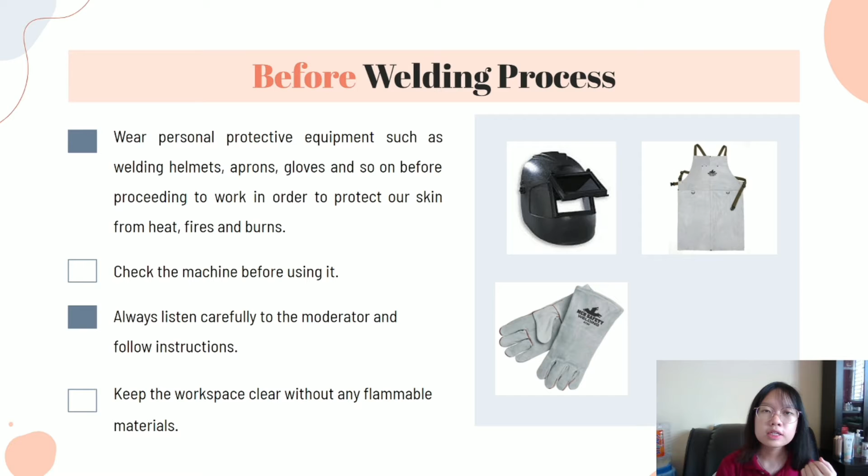During welding process, yang pertama, do not touch the metal parts of the electrode holder with skin or wet clothing. Yang kedua, notify the workshop supervisor immediately if the equipment encounter a problem.

Yang ketiga, keep your head out of the fumes and do not breathe the fumes. Sebab fumes tu akan mempengaruhi kesihatan kita seperti dia akan menyebabkan serious lung disease dan masalah pernafasan.

Yang keempat, do not leave the welding machine unattended when it is still running. Yang kelima, turn off all equipment when it is not in use.

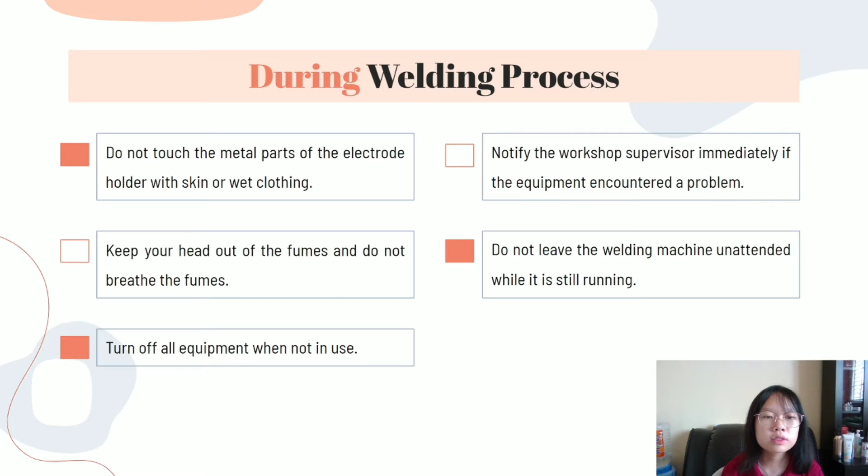Sekarang saya akan menerangkan prosedur bagi welding process. Step pertama, wear the personal protective equipment seperti welding helmet, gloves dengan apron. Step kedua, read the instruction at the welding machine.

Step ketiga, prepare 2 metal pieces and clean both of them. Step keempat, hold the workpiece firmly in a suitable fixtures.

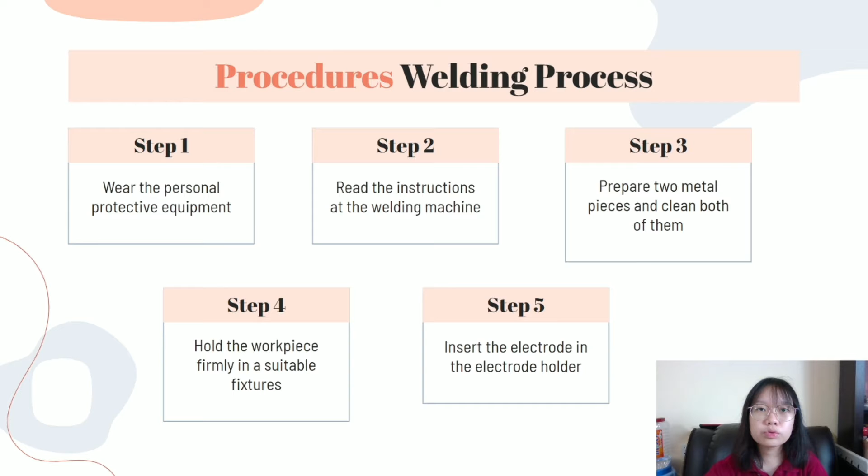Step kelima, insert the electrode into the electrode holder. Step keenam, switch on the welding power supply and set the current between 60 to 100 amperes depends on our types of electrode.

Step ketujuh, for the bead on plate welding, hold the electrode at the angle of 60 degree with 2 to 3 millimeters of clearance above the workpiece.

Step 8, hold the electrode over a spot at the left edge of the workpiece until a molten pool is formed. Step ke-9, move the electrode slightly from the left to the right and hold about 1 to 2 seconds before finishing the operation.

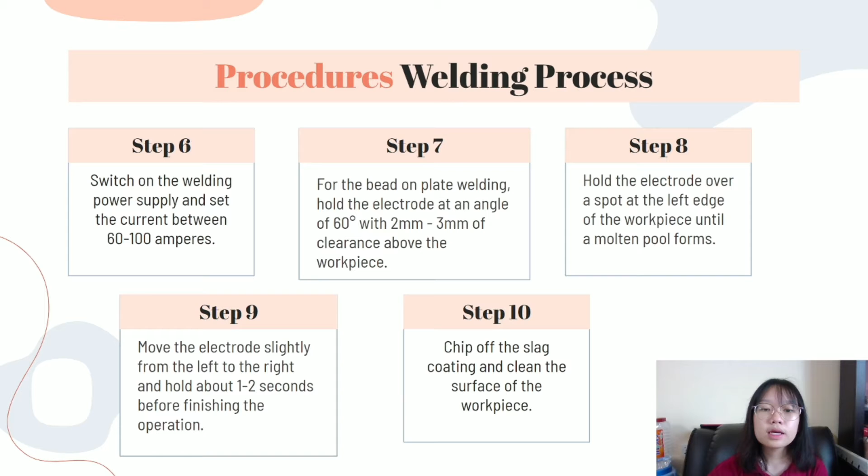Step ke-10, chip off the slag coating by using the chipping hammer and clean the surface of the workpiece by using wire brush.

Step ke-11, repeat all the steps for the other metal pieces. Step ke-12, for the butt weld square joint, place the 2 workpiece on the table and form a square butt joint macam gambar sebelah.

Lepas tu kita pun repeat the step dalam bead on plate welding. Step yang terakhir dalam welding process adalah clean the slag and dust around the area and keep the tools to its original places.

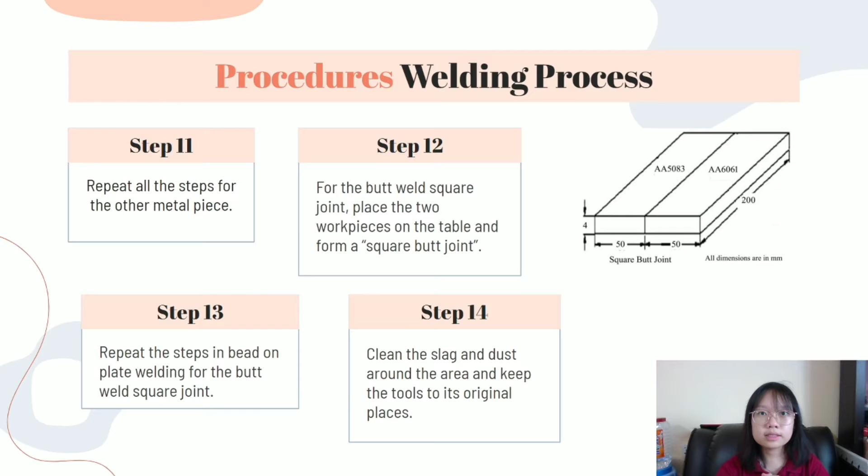Sekarang saya akan membincangkan electrode polarity. Dia ada 3 jenis. Yang pertama, straight polarity iaitu direct current electrode negative dan tujuan dia adalah untuk membuat shallow weld penetration.

Yang kedua adalah reverse polarity iaitu direct current electrode positive dan tujuan dia adalah untuk membuat deeper weld penetration.

Yang ketiga adalah alternating current dan tujuan dia adalah untuk membuat thick sections welding dan give pulsing arc.

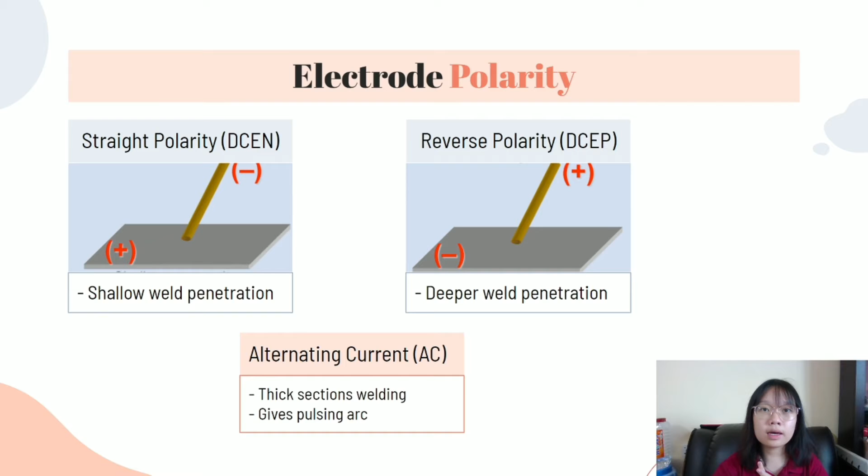Sekarang saya akan menerangkan electrode design di mana huruf E itu indicates electrode. Lepas tu, the first 2 digit indicates the tensile strength.

The third digit indicates the position, where the number of 1 is for all position, termasuk horizontal, flat, vertical dengan overhead.

And the number 2 is for flat and horizontal only. The last digit indicates the types of current and coating.

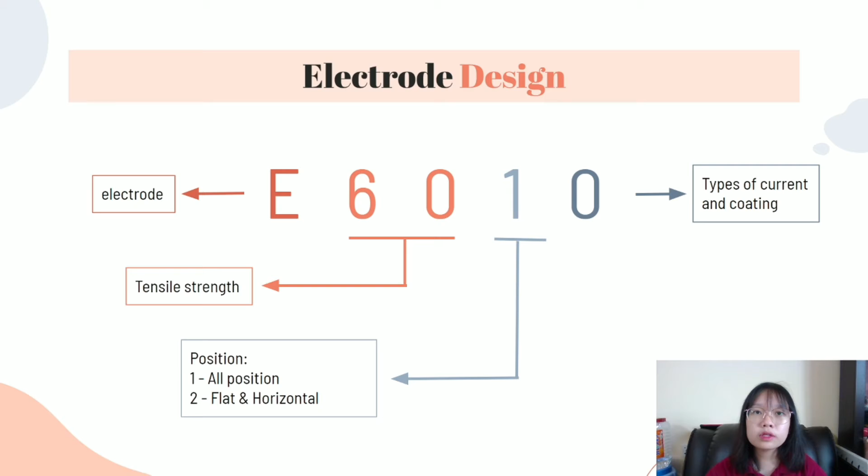Sekarang saya akan menerangkan types of electrode dan dalam ini saya akan memberikan 4 example sahaja.

Yang pertama adalah 6010. Dia dapat digunakan dalam DC electropositif sahaja dan dia punya arc length adalah 3.2 mm dan current dia adalah 85 amperes.

Properties dia adalah good in all position dan slag does not peel. Yang kedua adalah 6011. Dia dapat digunakan dalam DC electropositif dan AC.

Arc length bagi kedua-dua ni adalah sama sebanyak 2.4 mm dan bagi DC electropositif dia punya current adalah 70 amperes dan bagi AC dia punya current adalah 80 amperes.

Properties bagi 6011 ni adalah good in all positions dan slag does not peel. Yang ketiga adalah 6013. Dia boleh digunakan dalam DC electropositif, DC electronegatif dan alternating current.

So arc length mereka adalah sama sebanyak 3.2 mm dan bagi DC electropositif dan DC electronegatif dia punya current adalah 100 ampere dan bagi AC dia punya current adalah sebanyak 115 amperes. Properties bagi 6013 ni adalah good in all position dan peeling slag.

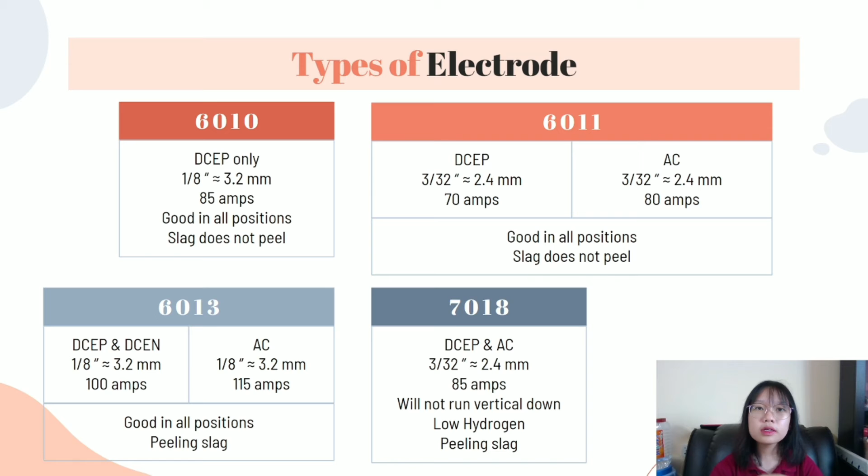So yang terakhir adalah 7018. Dia dapat digunakan dalam DC electropositif dan alternating current. Dia punya arc length adalah sebanyak 2.4 mm dan current dia adalah sebanyak 85 amperes. Properties bagi 7018 ni ialah dia tidak dapat run vertical down, low hydrogen dengan peeling slag.

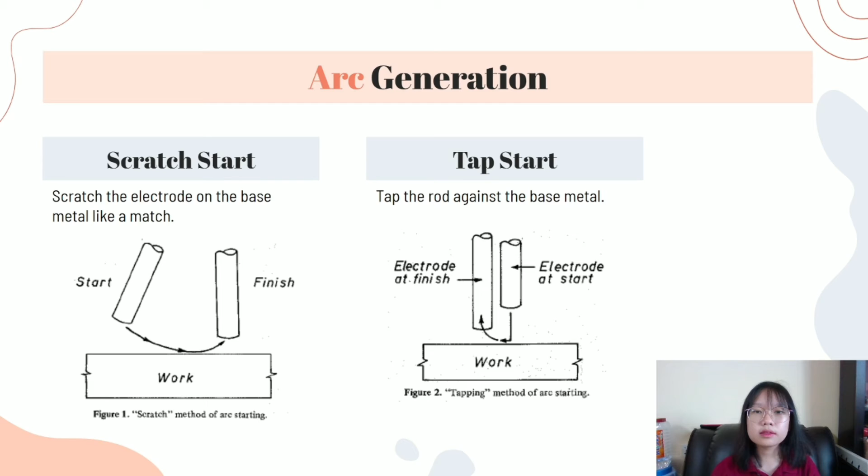Seterusnya adalah arc generation method. So dia ada dua jenis method. Yang pertama adalah scratch start, iaitu scratch the electrode on the base metal like a match. Dia lebih kurang macam ni lah dia punya method. Method yang kedua adalah tap start, iaitu tap the rod against the base metal. So dia macam tapping macam ni lah.

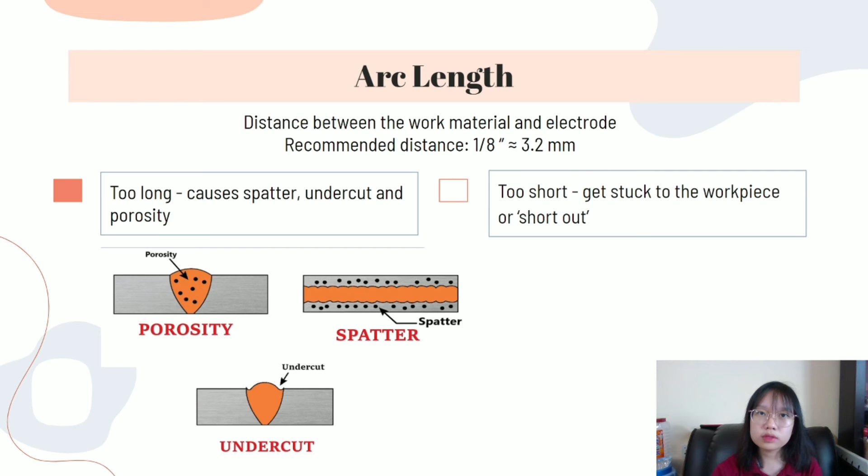So the next one is arc length, iaitu distance between the work material and the electrode. So the recommendation distance is about 1/8 inch, iaitu sebanyak 3.2 mm. Kalau kita punya arc length terlalu panjang, dia akan menyebabkan spatter, undercut dengan porosity seperti gambar di bawah. Kalau arc length kita pun terlalu pendek, dia pun tak boleh sebab dia akan get stuck to the workpiece or short out.

Seterusnya travel speed during welding process. Travel speed ni dia perlulah sederhana dan dia perlu maintain sepanjang welding process ni. Kalau dia terlalu cepat, dia akan menyebabkan ropey or convex weld. Kalau dia terlalu perlahan, dia akan menyebabkan wide weld with an excessive metal deposit. So korang boleh tengok gambar ni sebagai rujukan.

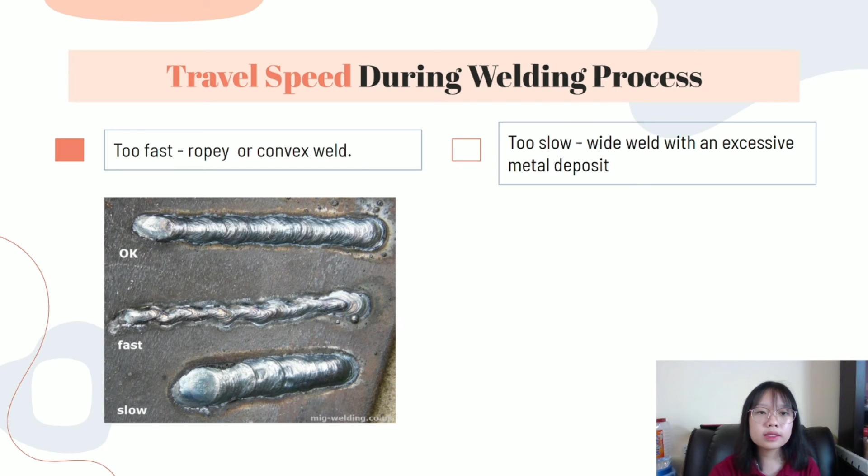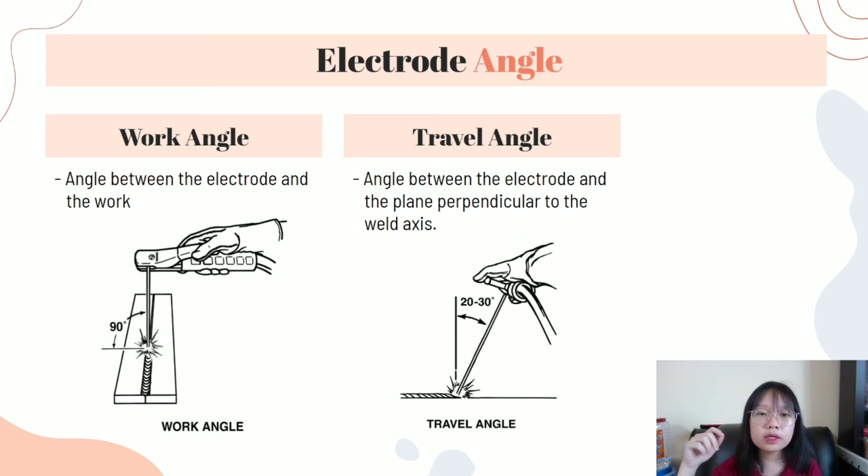So I will also discuss the do and don't during the welding process. Yang pertama, do not operate a welder on a wet insulation. Yang kedua, do not weld without wearing personal protective equipment, sebab kalau kita tak pakai ni, dia akan increase the risk of burns and injuries. Yang ketiga, do not breathe the fumes.

Yang kelima, double check to confirm there are no flammable materials around the working area. Yang keenam, ensure that your weld surface are clean. Yang ketujuh, turn off all equipment when it is not in use.

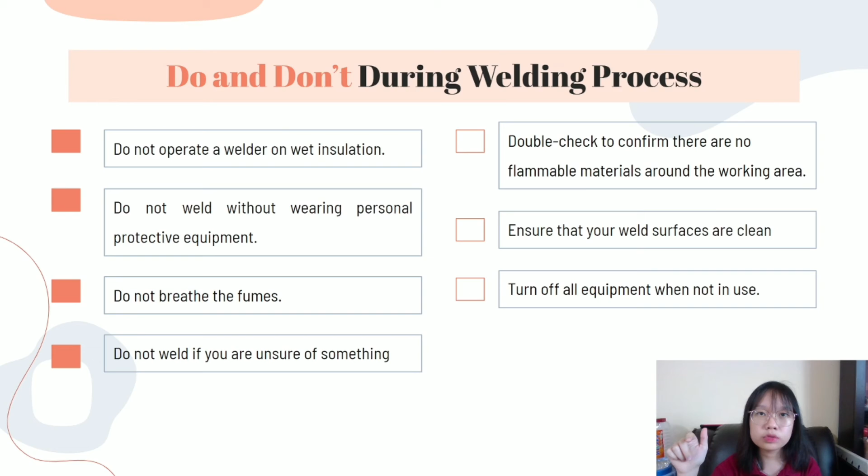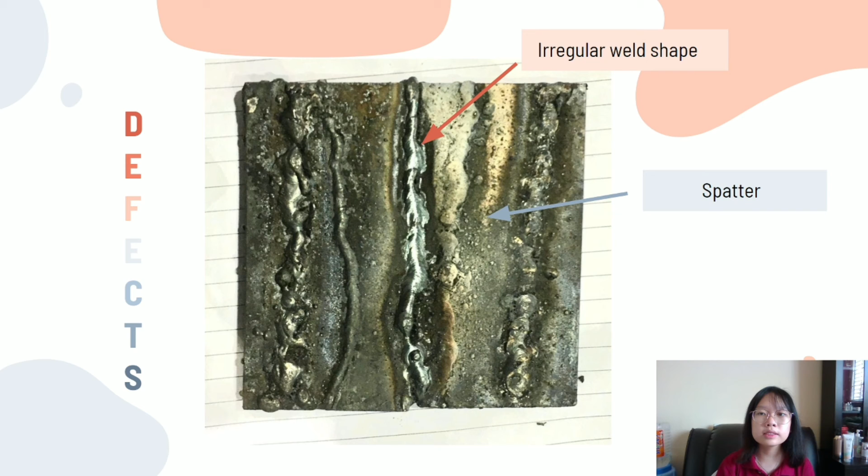Jadi, apakah causes yang menyebabkan defects ni berlaku? Yang pertama, the travel speed of welding dia tak sama sepanjang proses tu. Yang kedua, the current is too high or too low. Yang ketiga, improper gap between the electrode and the workpiece during the welding process.

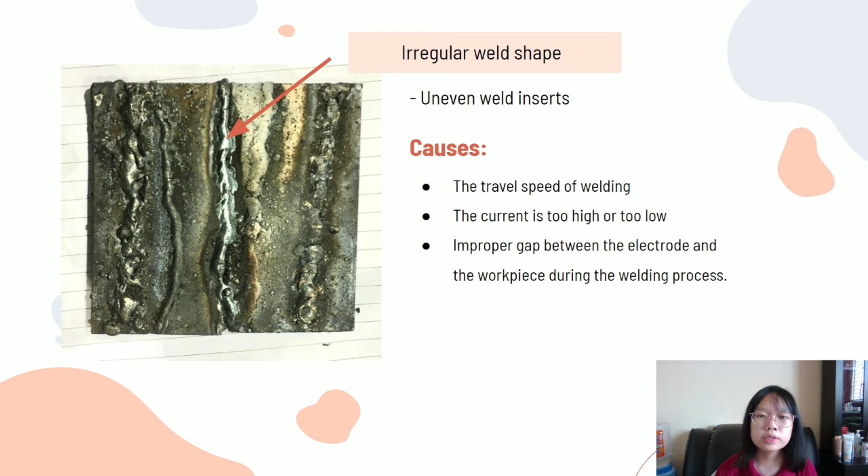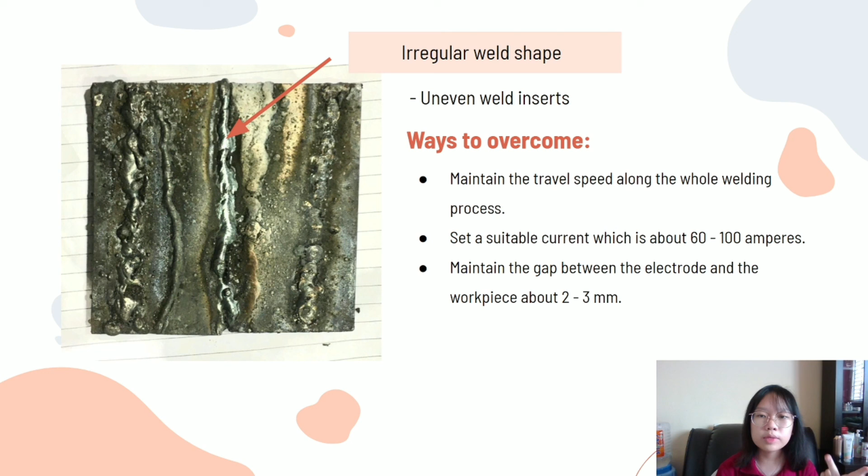Jadi, bagaimanakah kita dapat overcome defects ni? Yang pertama, maintain the travel speed along the whole welding process. Yang kedua, set a suitable current which is about 60 to 100 amperes. Yang ketiga, maintain the gap between the electrode and the workpiece about 2 to 3 millimeters.

Defects yang kedua adalah spatter yang made up of very fine particles of metal on the plate surface. Jadi, apakah causes yang menyebabkan defects ni berlaku? Yang pertama, the current is too high. Yang kedua, the gap between the electrode and the workpiece during the welding process is too large. Yang ketiga, the workpiece is not clean.

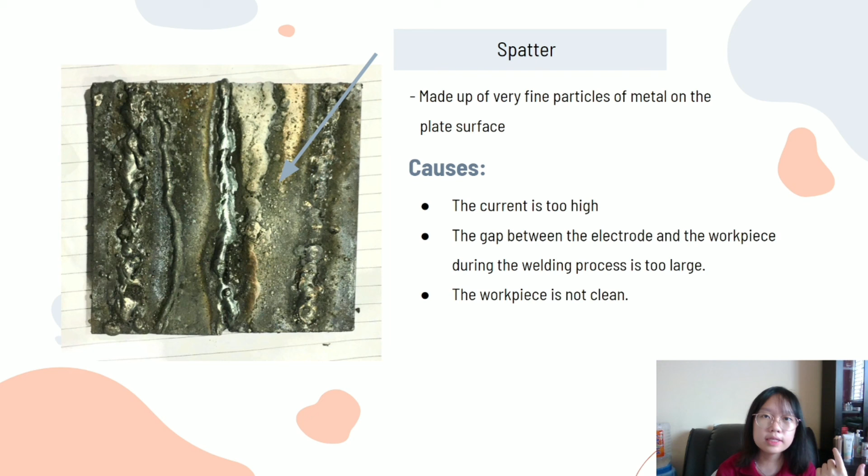Jadi, apakah cara untuk overcome defects ni? Yang pertama, set a suitable current which is about 60 to 100 amperes. Yang kedua, maintain the gap between the electrode and the workpiece about 2 to 3 millimeters. Yang ketiga, clean the workpiece before the welding process.

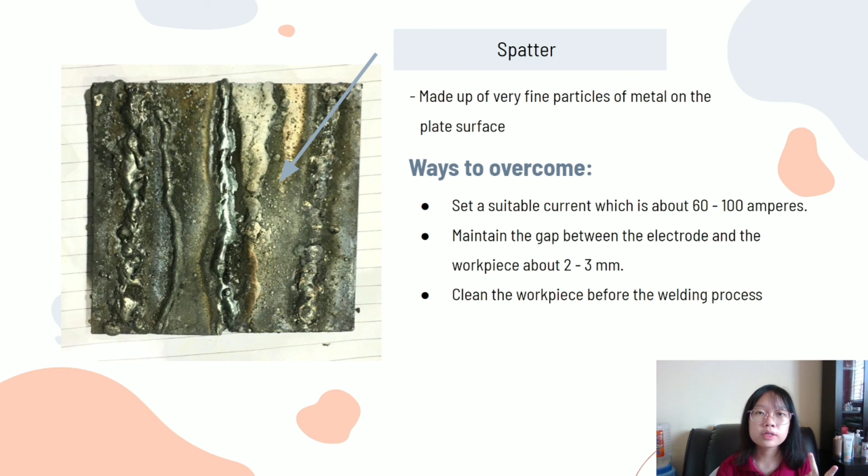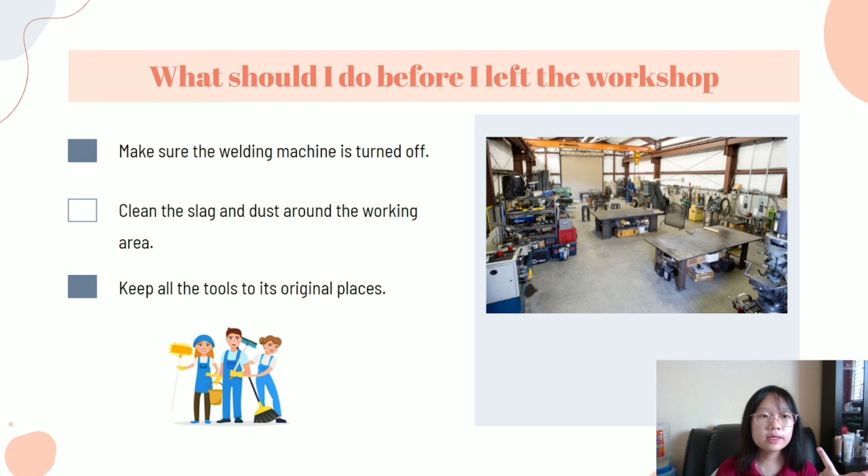So, for the last part, what should I do before I left the workshop? Yang pertama, make sure the welding machine is turned off. Yang kedua, clean the slag and dust around the working area. Yang ketiga, keep all the tools to its original places. That's all from me. Thank you.